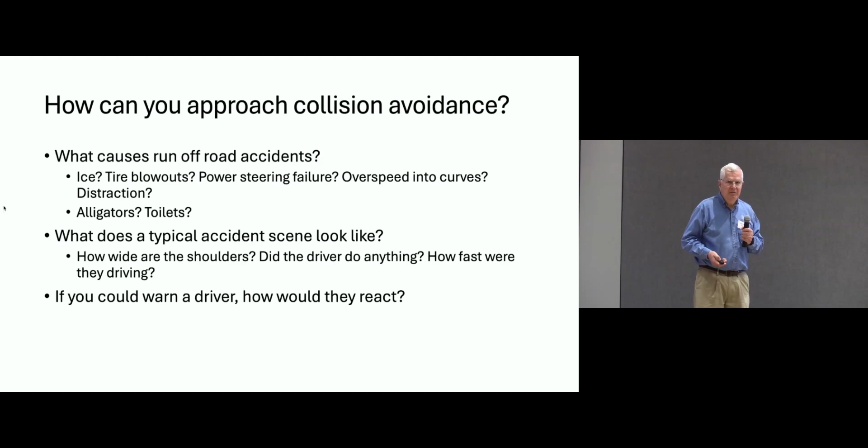We got some time on the Iowa driving simulator, which is like a flight simulator. Put a driver in there, have them driving down the simulated road, ask them to look for the Frank Sinatra tape, and there isn't a Frank Sinatra tape. And while they're looking down, you input a simulated wind gust. Now they're drifting out of the road. Now you can do things like beep at them or shake the steering wheel. In the US, if you nudge the steering wheel, they took the hint and they nudged it back.

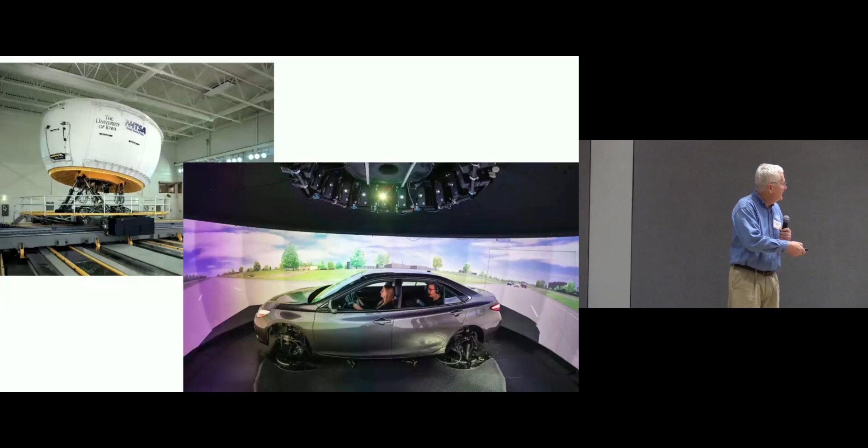In Germany, when our friends at Daimler tried to do the same thing and they nudged the steering wheel, a German driver said, "Nein," and pulled the steering wheel the other direction to counteract the bump they thought they just hit, thereby pulling the vehicle further into the ditch and causing a worse accident. So you have to understand the human factors.

Once you understood all of that, the context and the human factors, et cetera, now you can go out and start collecting how do people actually drive. And that's what Parag was up to. Now you can start to say, do you have to have maps? Now you can start to say, how well do drivers really drive? Do they drive differently when they're fatigued? Then you can start to build all of the vision systems, et cetera, that you need to warn drivers.

How about the full automation thing? We ended up in a consortium with GM and Delco as the car companies, Parsons Brinckerhoff and Bechtel talking about the roads, Lockheed Martin doing systems engineering, Caltrans, which owns the highways in California, CalPATH and CMU. Todd wanted me to put CMU before Berkeley. I said I saved the best for last, as the system providers, and getting ready to build a vehicle.

There is precedent that GM in the 1950s built this cool vehicle with turbine engines and swoopy tail fins, and it actually had an automated highway following system that could follow a buried cable. If we have time during Q&A, we can come back and show the video here.

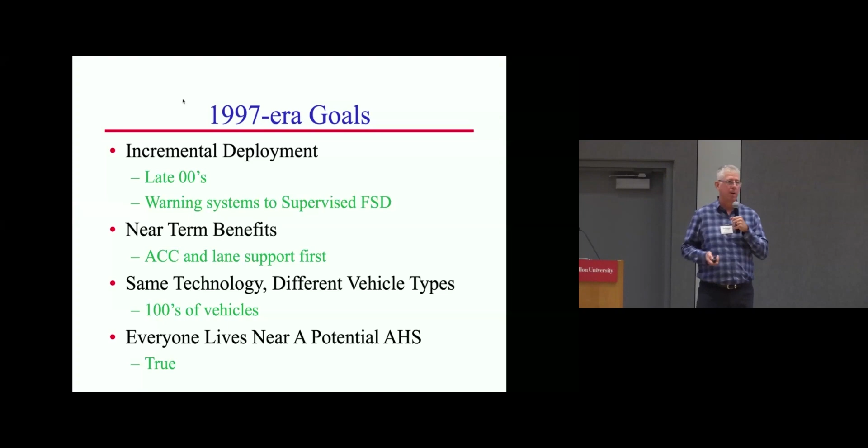A goal was to use the same technology on multiple vehicle types, and there are literally hundreds of vehicles now, from the least expensive to the most expensive, that have this technology. And another one that we pushed hard was, let's not build new roads. Let's let everyone live near potential AHS. And Chuck was more modest, but I think the battle's over. We're not going to have dedicated lanes anytime soon. And it's all been the free agent singular vehicle type solutions.

There are the 5 vehicles, 40-foot transit buses, minivan, 2 sedans. Technology was very similar to what's in every car now. We had cameras, we had radar. There were lasers on the buses. Audible alerts. We had our own DGPS base stations, which sort of isn't needed anymore now. All the internal sensors like gyros, roll pitch yaw sensors, safety takeover technology, like you grab the steering wheel and you have control back, you tap the brake, you have control back. All of that were on these vehicles built in 1996 and used in 1997.

The inside of the car, besides the system display in the middle, was identical to what was a stock car back then. I guess the head-up display was used on some Cadillacs. The guys at Delco did a nice job integrating an early version of a flat panel display into the dashboard, as well as audible alerts and feedback, and they put some special buttons on the steering wheels for us. So it was very, very slick for a 1997 vehicle.

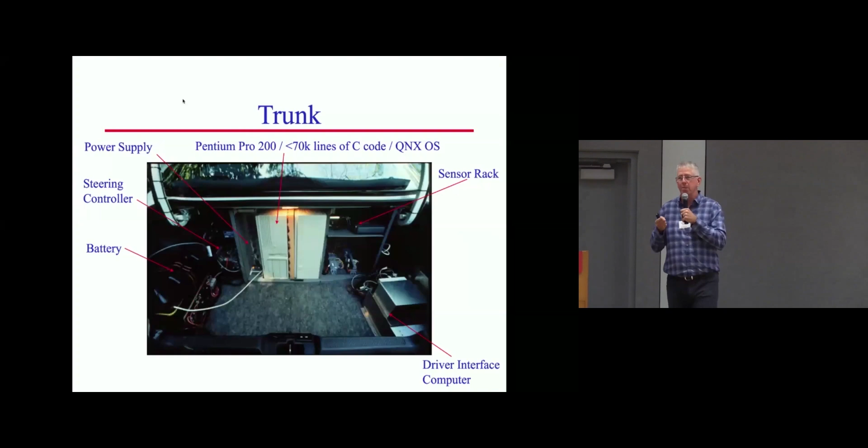Now, the trunk is very interesting, and you can ignore everything in there except all of these vehicles and all of the capabilities was powered by one Pentium Pro computer running QNX operating system and less than 70,000 lines of C code. Now, I'll have to say it may have been very poorly commented code without many safety checks, but it was a very compact code base doing all the steering, throttle, and brake.

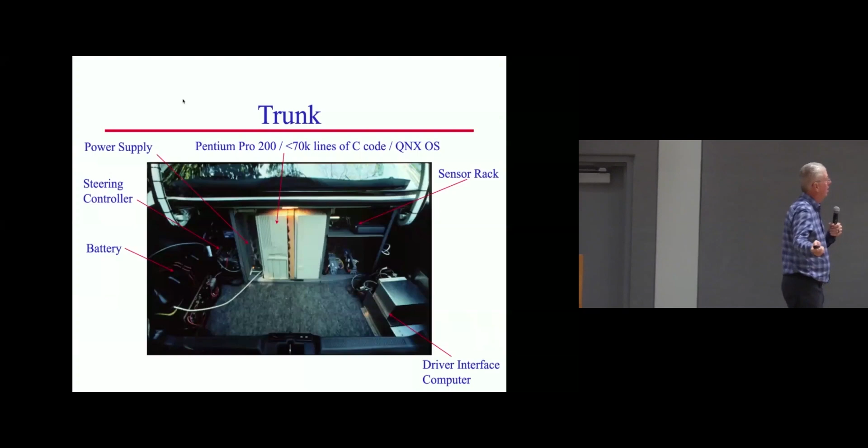You'll see this more in the video, but this is essentially what the system did. It used a radar to look out at the road ahead. It used a vision system to figure out where the lane markings were, or where the lane was, not so much the markings. It would integrate those two together and then make decisions about how to stay safe in its lane, both with the steering wheel and the throttle and the brake.

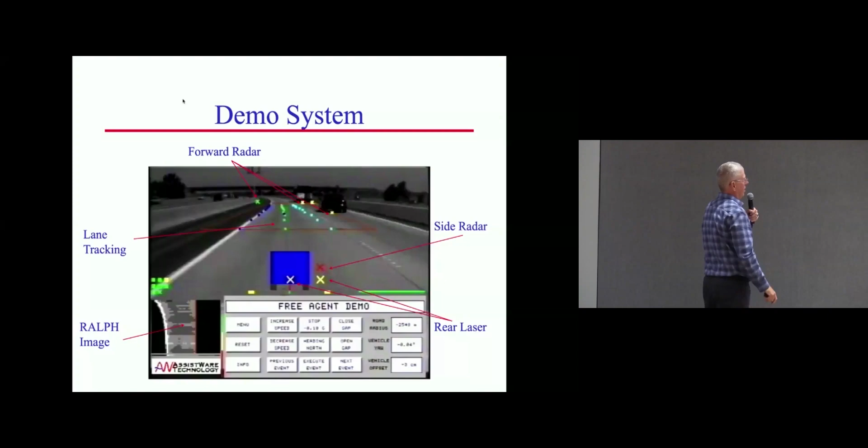In the picture, you can see the X's and the yellow and green X's, or the radar. You can kind of tell the outline of the road. And as you can see in the picture, and we kind of paid homage to the NavLab with the little blue truck looking thing, it actually could see what was around it. The side radars would tell you if there was a vehicle next to you so it wouldn't change lanes automatically.

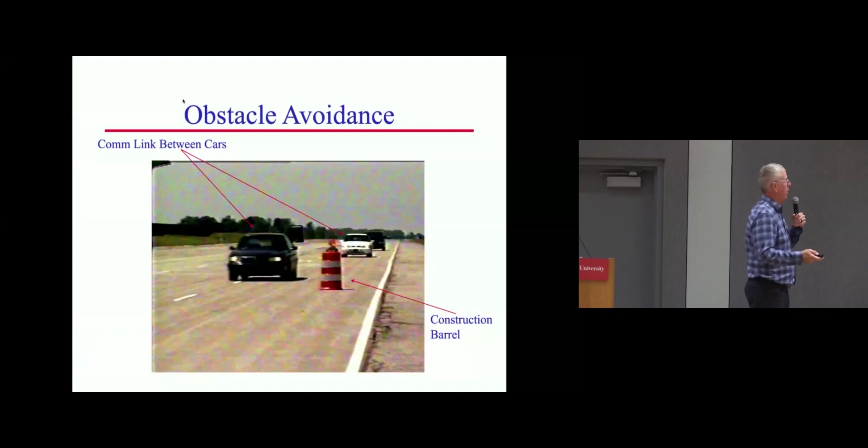It was able to detect obstacles, and we did set up a technology where it would pass through this early version of Wi-Fi to vehicles behind it. There was an obstacle there, so they could actually change lanes without seeing the obstacle, and we'll see this in the video. All in all, it was very successful. Of the 100 runs we did, 91 were successful. The buses over this 8-mile track in San Diego, California, were 40 for 40.

99% of the people miles were successful, and I think 800 demo riders and 1,500 total riders, including the test sessions. In that 2 or 3 week span, we tested and drove over 12,000 miles with 5 vehicles. And since the statute of limitations has now ended, we didn't crash, unlike some of the other teams. Richard, you're welcome to explain that more.

Areas for improvement back then. Complete obstacle coverage. Now, I said it was 360 degrees. It was, but the sides and the rear were very coarse radars that had maybe 1 or 2 beams, so it was very coarse, you couldn't tell. The forward radar had 8 beams, so it wasn't very well localized like it is now, so that was an area for improvement. Also, like now, vision in harsh conditions.

You know, I was amazed, frankly, at some of the things Dean did with ALVINN and RALPH, and how he did the vision processing was incredible. But if you can't see, you can't see, at least in the visible spectrum. So things like fog back then, clearly a problem. That would still be a problem now. And obstacle detection. Larry, can we detect negative obstacles yet? Never, exactly.

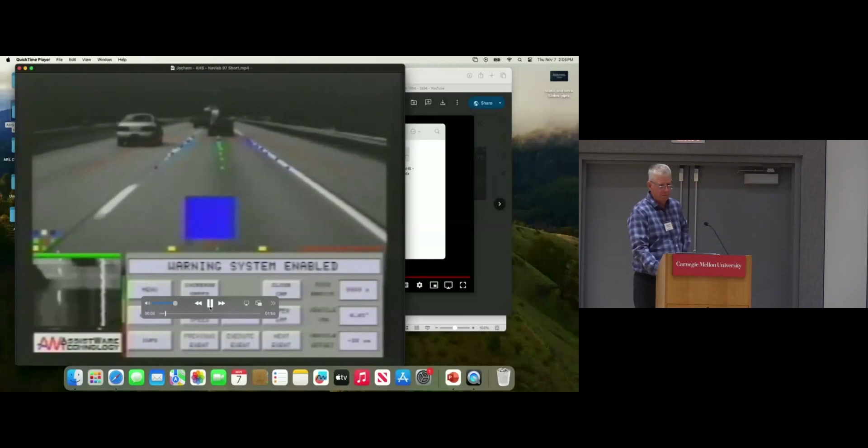With a variety of sensors to see the road, traffic, and obstacles around it. It has a radar buried in the front bumper, a miniature TV camera mounted behind the rearview mirror, a GPS satellite positioning antenna on the roof, a LiDAR to look for traffic behind and in adjacent lanes, and sensors for vehicle speed and heading. As I drive along, I turn on the intelligent cruise control and the NavLab 6 keeps a safe distance from the car ahead automatically.

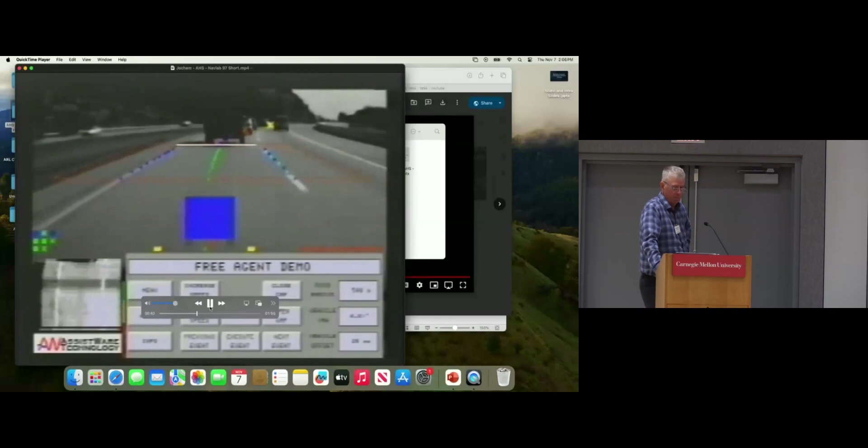The computer systems are constantly watching the road and its surroundings. Ralph, the vision system, tracks the road by looking for lane markings and any other features which are high in contrast and parallel to the road, such as shoulder edges or pavement joints. The radar on the NavLab is an advanced model. Unlike most automotive radars, which only measure range to other vehicles, this radar can also measure relative speed and bearing.

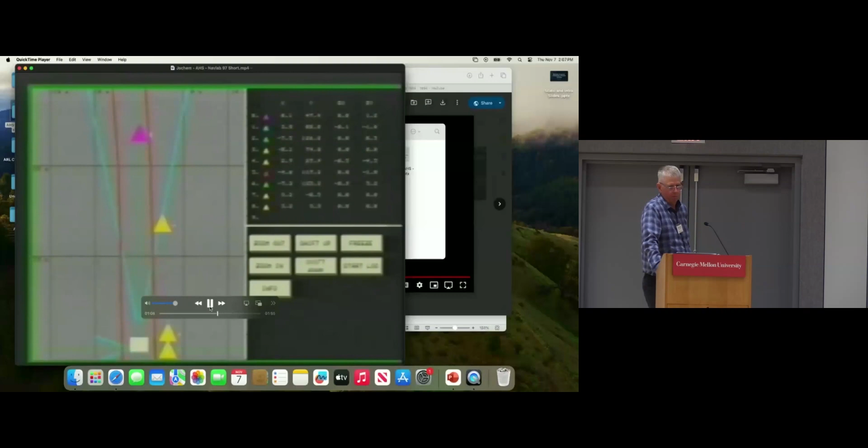When the computer puts together the road location from Ralph with the target locations from the radar, it can determine if another vehicle is in its own lane, the next lane, or on the shoulder, even when the road is curving. When I hit the interstate, I switch the NavLab into autonomous mode. It is constantly monitoring the position of other vehicles around me and keeping an internal model of what they might do and how it needs to maneuver for safe, defensive driving.

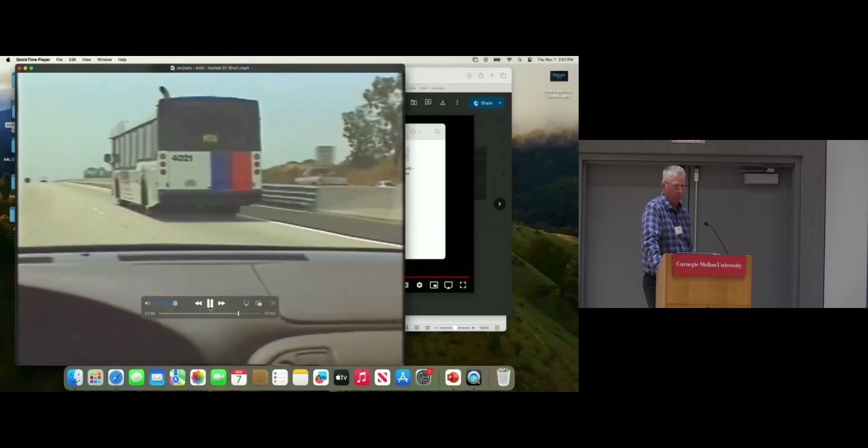As we travel, the NavLab 6 detects other smart cars and buses. Since those vehicles drive more predictably and communicate with each other by radio, the NavLab can close up the gaps with those vehicles. As the NavLab drives around a curve, its radar sees an obstacle, and the vision system correctly detects that the obstacle is in its own lane. It also radios a warning to following automated vehicles so they can make a safe maneuver before they even see the obstacle.

All right, so the question I have, Tony and Chuck, who is that? We know? Larry? I thought Larry. It looks like Carl? All right, we'll have to find that out.

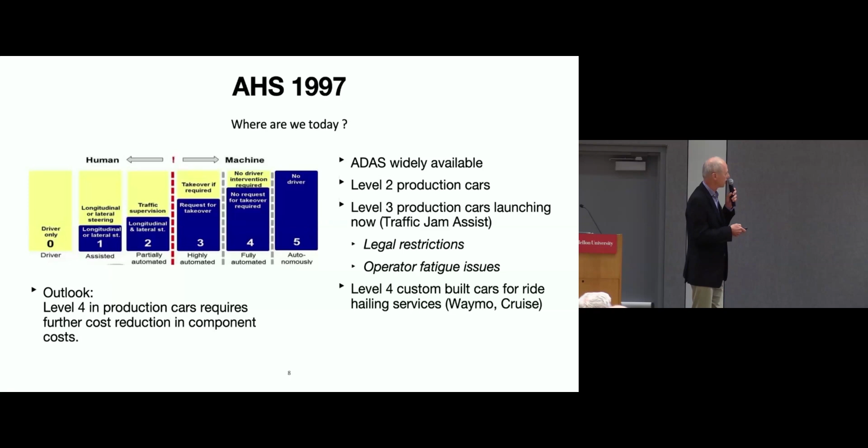So Automated Highway Systems Demo '97 was here at level 2, where we had already longitudinal and lateral control, but the driver still had to supervise. So the expectation is that there was a safety driver behind the wheel that at all times was fully aware of what was going on. And in the industry, advanced driver systems today are very widely available, not just in upper-end luxury cars, but also in medium and lower-end cars. We today have level 2 production cars like the Tesla or from Mercedes and GM. And we have the introduction of level 3 production cars, which mostly at the moment still run at lower speeds for safety reasons, which is traffic jam assist up to 40 or 60 kilometers per hour.

So level 3 actually means that the car can autonomously drive under certain conditions, but the driver still has to be available to take over when the system cannot perform anymore. And there's discussions in the industry whether level 3 is something that should be implemented, or whether we should directly go to level 4, which is automated driving in specific environments, and the driver is not required to take over. But the automated driving is limited to very specific environments. So there are car companies that have introduced level 3 driving, and it remains to be seen how well that will be accepted.

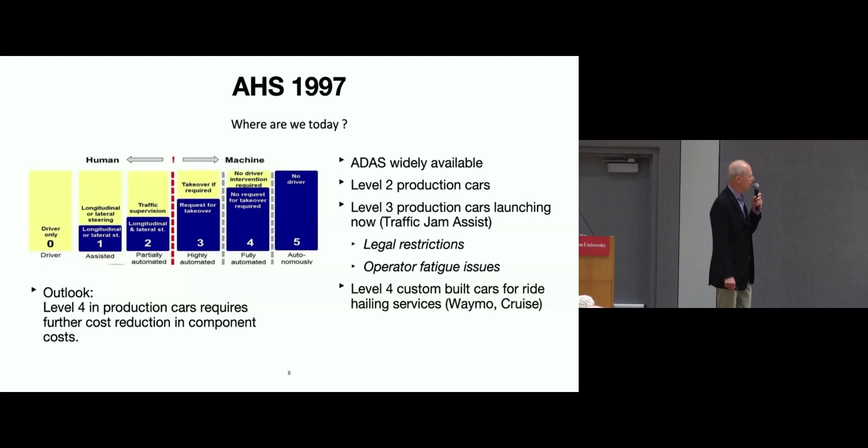And you need to also ensure reliability, especially of sensors. We are slowly getting there, but it's not quite there yet. So this will probably take still a considerable number of years before we get to level 4 production cars. And then level 5, which is autonomous driving pretty much everywhere, at least for personal vehicles, that may be a very long time in the future.

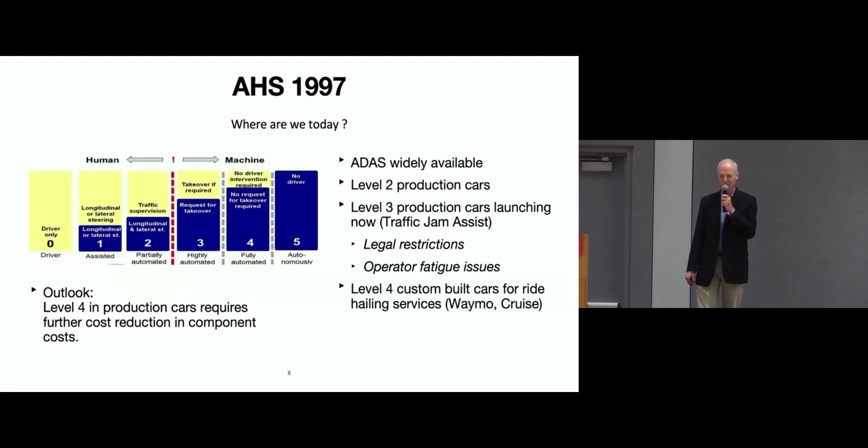Well, hello, everybody. I am deeply honored to be here because I'm not from this community. I'm an outsider who happened to intersect with Carnegie Mellon during those heady days of the 90s. And I've stayed with the autonomous vehicle world ever since, really surfing the wave as it cranked up. So I'm going to give you a feeling for where we are today. But before I do that, I'll comment on some of this history we just heard.

What hasn't been talked about is how did this idea of USDOT doing an autonomous vehicle activity even occur? It did not bubble up within the existing USDOT. It came from Congress. So this all started in 1991 when the Berlin Wall had just come down and Congress was moving money from defense over into civilian things because this was the end of war, right? We're done with all that.

And somehow, some way, the chief scientist in one of the congressional House committees wrote it down: the Department of Transportation shall develop and demonstrate an automated highway system and shall demo it by 1997, which was the end point of that legislation. This was the authorization bill for USDOT covering the next 6 or 7 years. That's how it showed up.